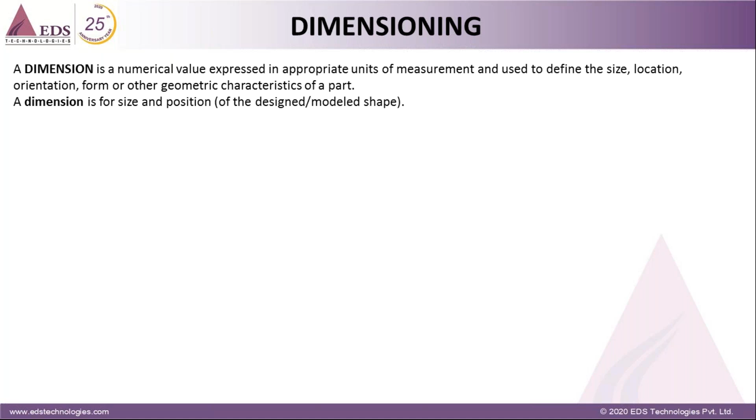We know what is the position, what could be our reference, what is the position and all that stuff. And this position and size is very much important when you go for manufacturing. In manufacturing, the dimension will also have a tolerance, acceptable tolerances, you can say intentional tolerances. If it goes beyond that or below that, it is rework or scrap, whatever it is. So the dimension gives the variety.

It gives the variety of design product variants, or we can say drives product capacity derived from business needs. For example, today I'm manufacturing a 150cc engine vehicle, or a 16-seater aircraft, or a special purpose machine. It could be anything, like it may be taking care of some tonnage, or I may be working on some motors, a 1 megawatt or 2 megawatt or half HP motor, whatever it is. There is a new requirement: how fast I can adapt all my dimensions, all my calculations, everything to the new product. So it's like ease of whatever I get, and how best I can utilize my dimensions. So as you can see, it's very clear.

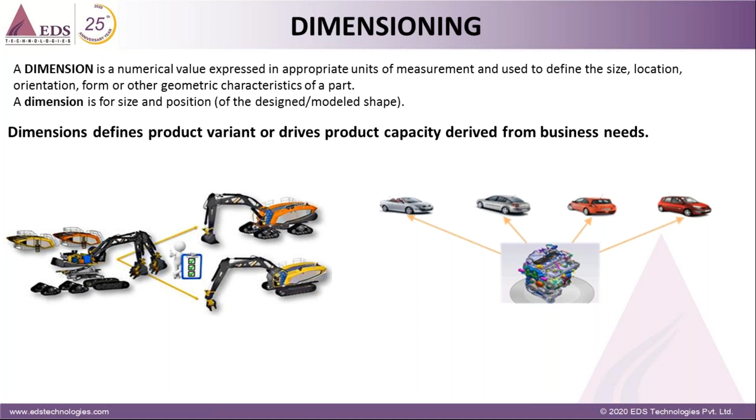I can use the engine for any variant of the car, or use the body of the heavy equipment machineries to fit my requirement, or my customer, client, or end user requirement. So what comes to mind is how fast we get solutions for the new requirement or variant. That is very important for us.

So whether my tool is capable of, or my system is capable of, whether our solutions are capable, or if any market has such kind of solutions which will help us in quick adoption. We can call this variant management.

Variant management, at the broader level of product lifecycle management, comes to the designer level, engineering department, design department, or R&D department: how I can play around with my dimensions, and how information is sent to the manufacturer through the design team. These are the questions that always come to mind when we see this.

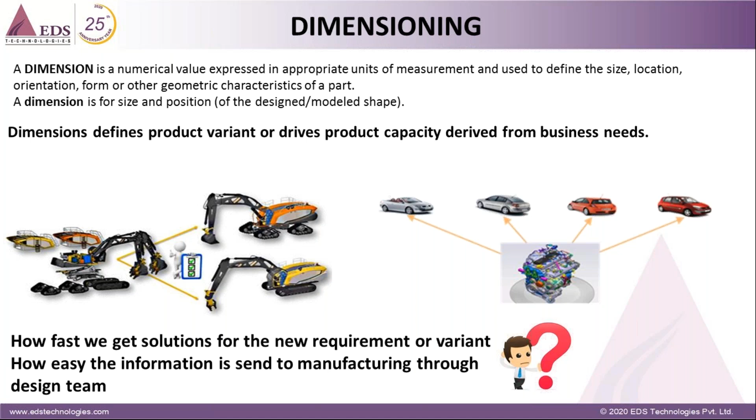I just wanted to quickly go through the evolution of the design process. There was a time in the 1970s when dimensions and drawings came into existence. We call it engineering drawing or machine drawing, and all the concepts were put into 2D design.

This 2D design probably started using drafting tables, with drafters and all that. Then came the evolution of new 2D softwares, and finally that 2D software was capable of doing a few iterations of whatever changes we wanted. Instead of needing 100 manpower, it was reduced to 10 to 20 people, moving from manual work to using software.

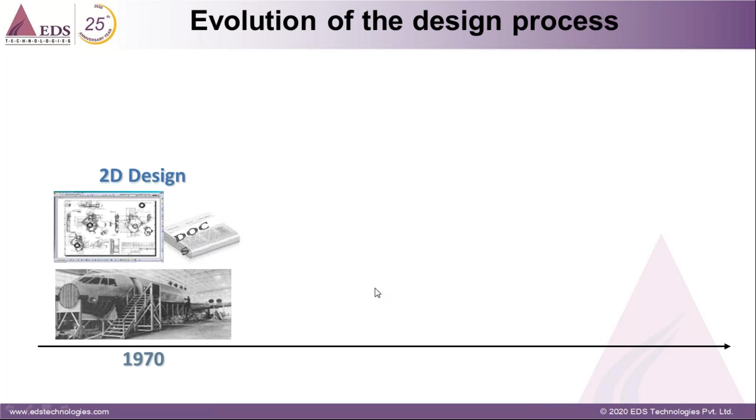Now, 2D design and drawing were converted into 3D in the 1990s. The Boeing 777, and even Toyota, and the entire DMU concept — the DMU of the aircraft was converted from 2D to 3D, along with the workflow, to check for clashes, like walking inside an aircraft virtually to see what issues exist. Boeing adopted some of these solutions, which I'll talk about later.

Then we come to today, where our design or manufacturing needs, or our sales people's quick adoption, require us to assess our dimensions for manufacturing, production, quality checks, and other things. That's the main reason we wanted to bring 3D design, or the 3D master, into existence. This makes communication very easy.

Now, what if we use this 2D drawing or 2D design? What problems arise in terms of business impact? As a company, a process, or an individual, you would have seen a few challenges with respect to what is happening.

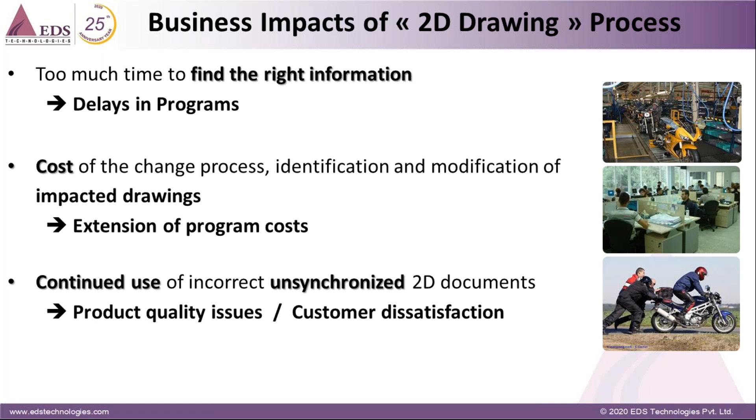The product quality issues and customer dissatisfaction, and too much time taken for quality understanding. For example, it is human, we may have some human errors also, and when you go specifically into the 2D drawing, it impacts design, manufacturing, and quality as such.

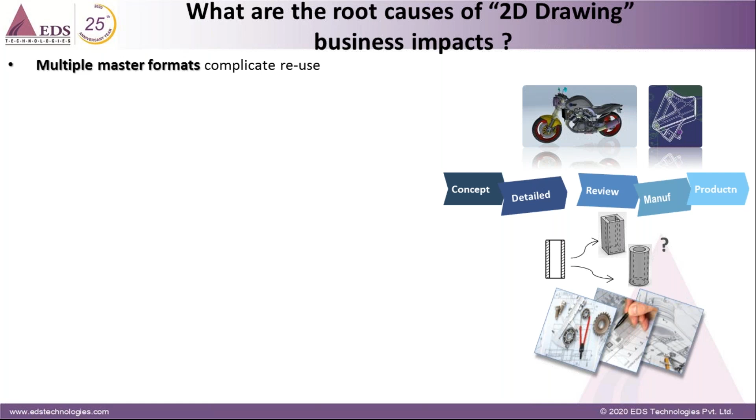As we already spoke, multiple master formats complicate reuse, so it becomes very difficult to know which one to take. So whether I'm in manufacturing, I have to wait for my CAD designer or the designer who has done this. No continuity among an increasing number of stakeholders.

It's obvious that as it goes out of the design department, the engineering team comes into it. Supply chain management, procurement or purchase department comes into it, and manufacturing, production, quality inspection, many others. So now there's no continuity. What we say is when you are into 2D drawing, I can just put a remark in the drawing or in the soft copy and send it back. How it is impacted in the background, that I may not be knowing.

Misinterpretation due to 2D drawings as a reference. It's a very big task.

We keep always talking to the purchase people in our day-to-day life. The designer goes and explains to manufacturing or production. So what happens is, if you see this, I've taken it from my 3D. If you see this image, it's all in anyone's perspective. What is it exactly? When I see this cross section, I can say it is rectangle, or I can say it's cylindrical. So it's all my misinterpretation, I can say, and it is not clear what is that I'm trying to say when it comes to 2D drawings.

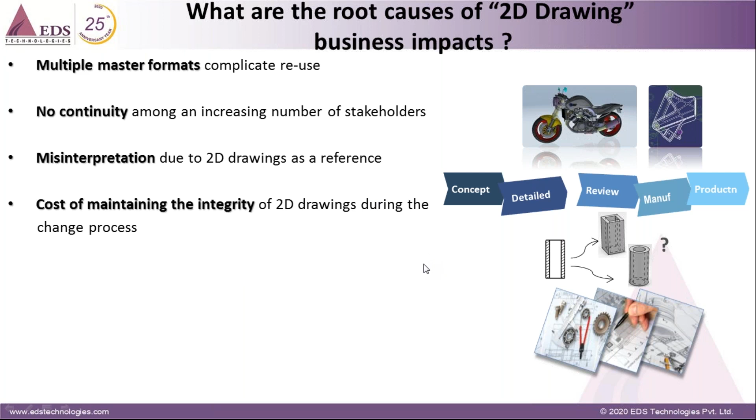Cost of maintaining the integrity of 2D drawings during the change process. So what is the impact? Again, I should have a newer version of it. I have to copy that and create a new one, try to modify a few things. Again, I have to change my layout and other things, and spend more time to get clarity in virtual assembly prototyping.

So when you say 2D and you are working on big assemblies, you have to spend a lot of time to realize what the drawing is trying to communicate with me as a manufacturer or production guy. And again, if it is taken after the production and manufacturing, and quality or inspection or whatever, and the validation comes into it, this virtual assembly prototyping takes a lot of time for my clarity.

Instead of that, I can better utilize it. So it all depends on my understanding. So we need to spend a lot of time in 2D assembly drawings, I can say.

And when it comes to tolerancing and GD&T, it's non-semantic when you go for 2D, and I'm not sure from part to assembly level due to missing 3D tolerance analysis, which is generally based on best practices. So I'm not using any 3D tolerance analysis here. I just give the dimensions and whatever I've done in the drawing. So these are a few business impacts which come through 2D drawing.

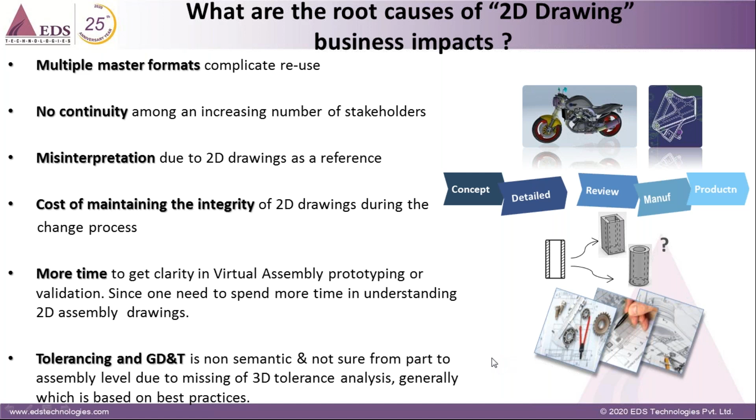Okay, and when it comes to manufacturing business challenges, because they have their own challenges: managing the cost of product complexity, evolving consumer expectations. Today, customers' expectations are highly demanding. Their expectations are that we have to be very fast in the market, quick, reactive, and how fast I'm changing in my change action in my present design. And managing product complexity and diversity.

Complexity because of the many new types of manufacturing. Additive manufacturing is one example - whichever process I'm not able to get in the standard process, I can go for additive manufacturing, quick reference or quick manufacturing or whatever it is, so that gives me more flexibility and other things. So this is one of the competition ways, or complexity is going high.

And established technology standardization and IP reuse. It's like I need one platform where I always talk about design standardization, which will also derive my new product development and new technologies. So this should help the manufacturers, who are facing huge issues of standardization. So then the standardization comes from the 3D level.

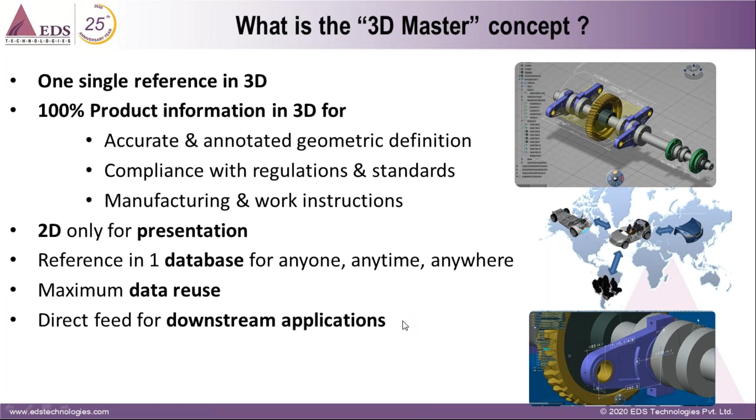And 3D master end-to-end process coverage - the conceptual design, the detailed design, the design review, manufacturing design, and production and installation. So here we are not talking about anything with respect to 2D design or 2D drawing. We're all talking about the 3D master again with the 3D design.

So it has some process. It starts with conceptual design, the detailed design, and the review. If you have any changes that you wanted to make, and the manufacturing and the production. So when it comes to the 3D master,

enabling the digital community. So we generally come across a lot of exchanges with respect to conceptual design to manufacturing and production. We are doing everything with the 3D, and also with our suppliers.

We cannot leave our suppliers behind - we have to grow ourselves with our suppliers by educating them on such technologies and making them also part of this transformation.

And also when we say that, we can also show this to your customers, authorities, like if you are going for standardization or anything like that, and you have made some technical partners, service partners, or even educational partners, or whomever it is, you can definitely share the details in all respects to 3D.

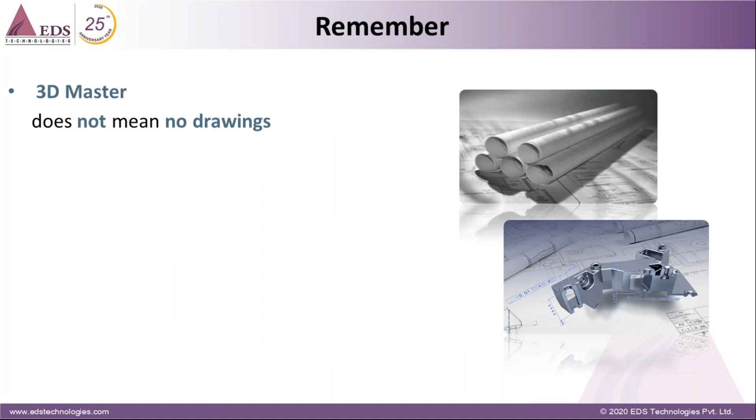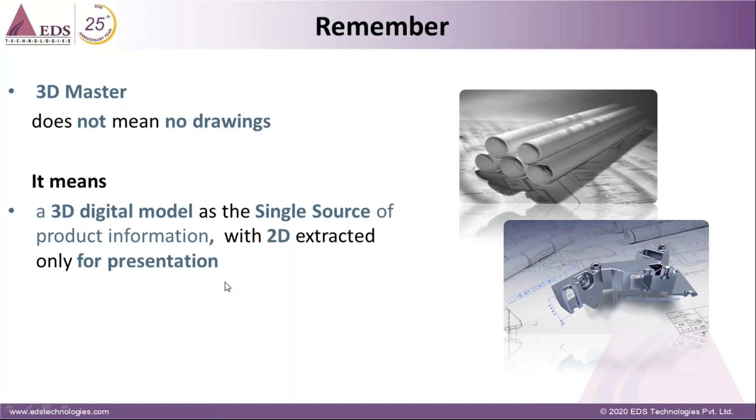A quick reminder that the 3D master does not mean no drawings. It will have drawings, but they're left as a presentation. As I said, it means a 3D digital model as a single source of product information, with the 2D extracted only for presentation. So this is only for the presentation layer, only a formality I can say. If I want, I can just give a print.

The 3D master value proposal is what we wanted to give: conceptual design, detailed design, experience, and manufacturing production, which we'll see one by one now. So I have a quick video for conceptual design, showing how conceptual design can help with the 2D layout in 3D design.

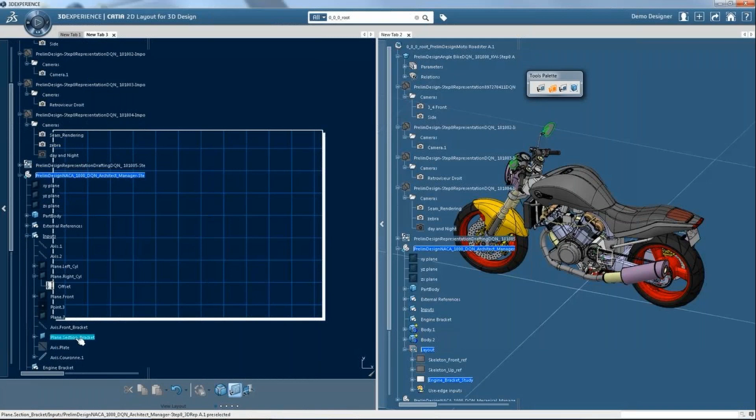So I'm now opening. The designer is opening the 2D layout for 3D design. Now I'm arranging all my views here, taking my section and whatever I wanted. I'm directly putting all my 3D data on this. Now you can see the window got split, and all the sections from my master design, the 3D master design, I'm just putting here. I'm not spending extra time here, just sizing and allocating inside the layout.

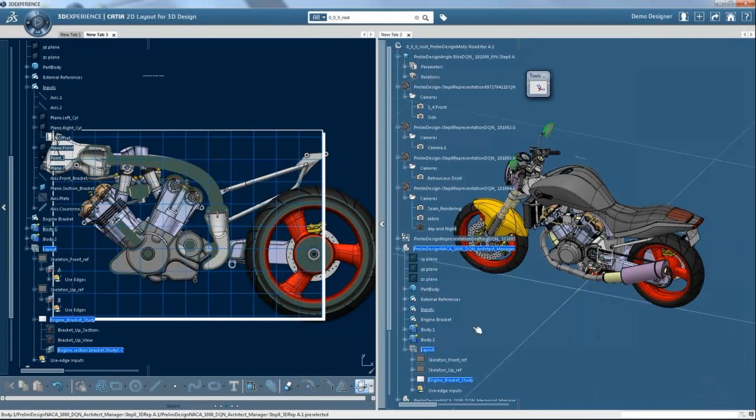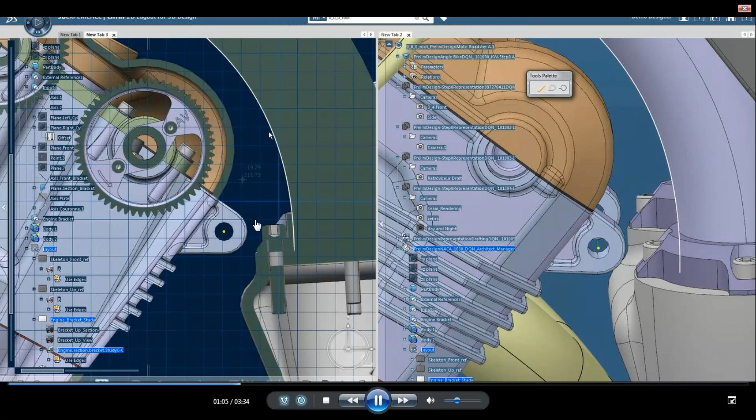And what happens here is you can also see there are a few changes that I'm doing, and I can also impact the changes here, directly taking the reference from my 3D, and it is highlighted in this 2D layout. This is what we call 2D layout for 3D design. So the impacts are happening in both screens. This is the understanding we get from the tool from 3D master.

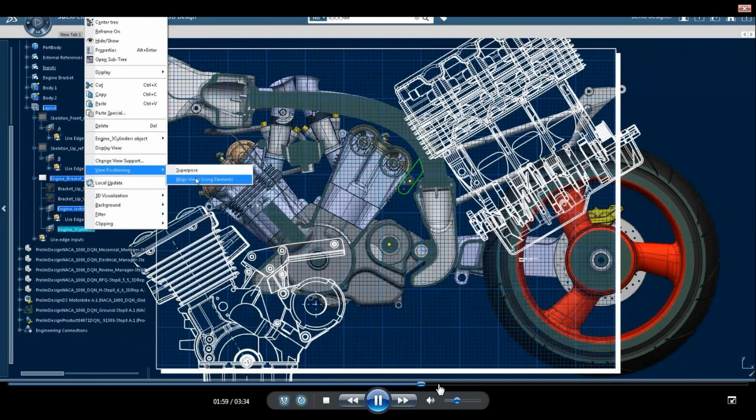So I'm bringing one more component here. I'm pasting my component, and this is my virtual validation that I'm doing at the assembly level.

So in parallel, I'm working with 2D conceptual as well as the 3D design.

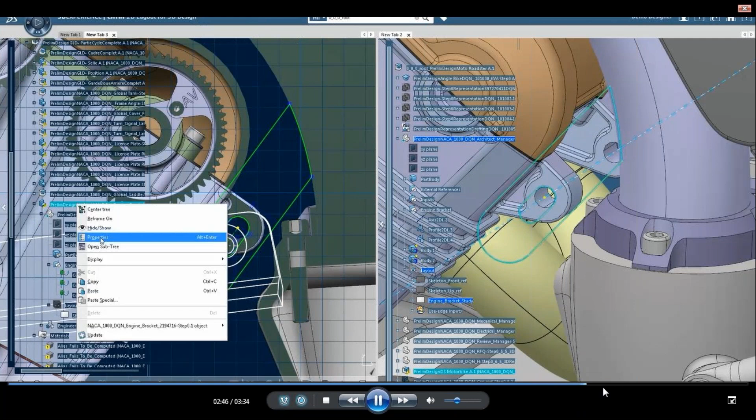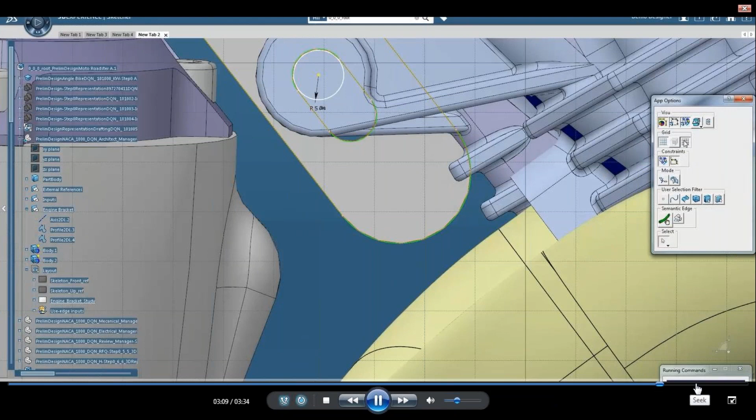So I've opened this single part, and whatever impacts I'm seeing, it's directly online. I need not update anything here. I've already done my drafting there, using my 3D master design for doing the drafting, because drafting is another only a formality that I wanted to show. So what we take from here is more flexibility. As you saw, the concept is on one side and the drafting is on the other. That becomes more flexibility and simplification in early study. You can understand what the manufacturing level of impacts is, happening at the early study only. That's one understanding we get from the conceptual study, keeping everything in mind with a single model definition. So it's very important for us.

And when you go to the detail design, I'll start with the part level of detail design that we give in the 3D master.

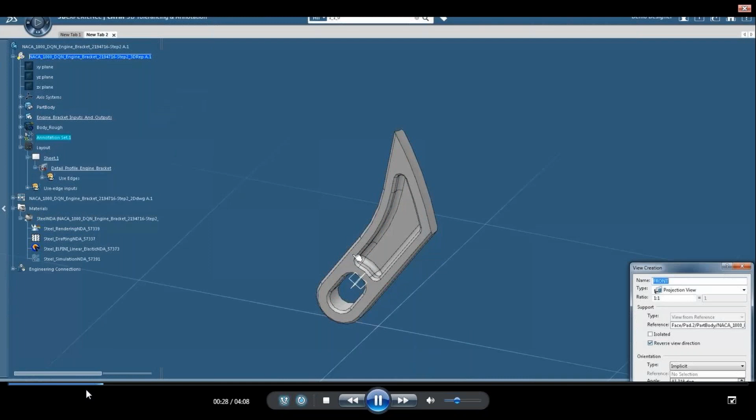So in this 3D detail design, I've taken the same part here, extended that, and I'll show you how to make the 3D master dimensions. It's like you're working on the same thing, instead of only creating views in the part or assembly level like in drafting sheets -- you do it the same way here. But you have to tell it, and it is more semantic. It will give me a semantic tool.

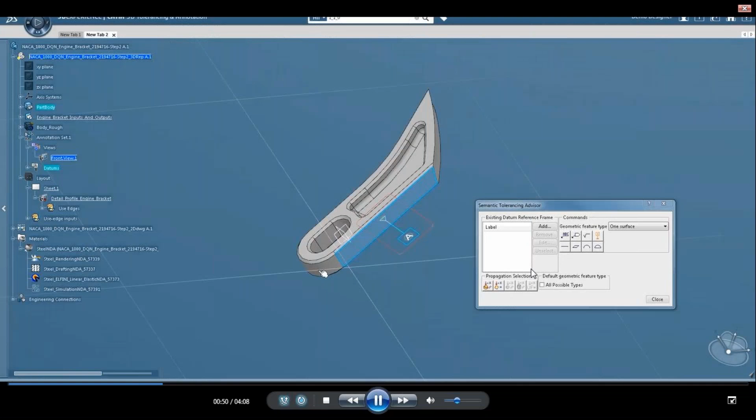Like if I select one of the heads, now you can see the possibility it can have the GD&T, and I can make it as a reference, or flatness, straightness, or whatever it is, I can give it here. And the tolerances -- if I don't want to give it at the GD&T level, I want to give my own tolerances, that is also possible here. You can see it at the radius level with plus 0.2, say, and the other one.

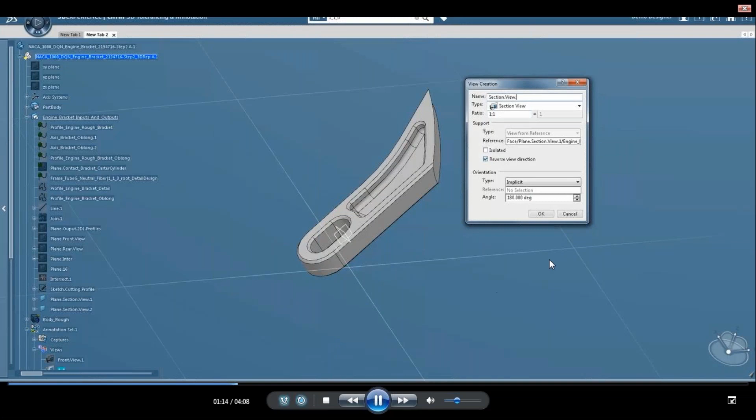And I'm doing another sectional view here. One is the front view I have completed. Now I'll take another scene, or another section, and this is the section I wanted to showcase. In this way, I just communicate with everyone, and I send this file in a neutral, readable, lightweight format. It's only a viewing authorization if I give it to them, not an editing authorization.

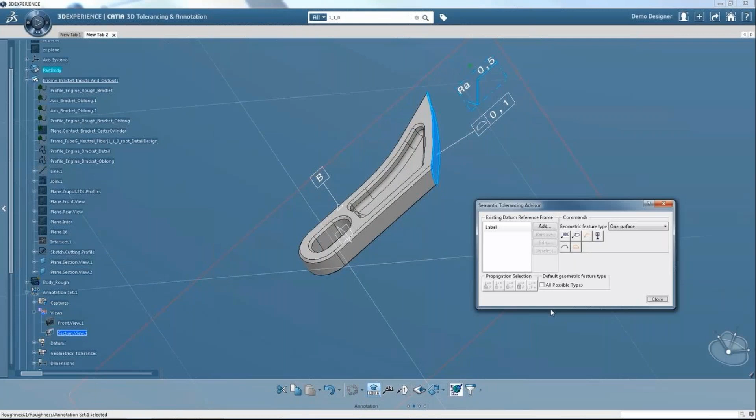So it will be very easy for them to understand, and once it becomes habituated in our system, the communication becomes very fast, and we can also think about analyzing or spend more time on new product development. As you saw, I've selected this extended hole.

And I've selected all my surfaces and what tolerances and other things I wanted to give it. So we are going for the other section now. So what is that? It comes to my mind to give all those tolerances.

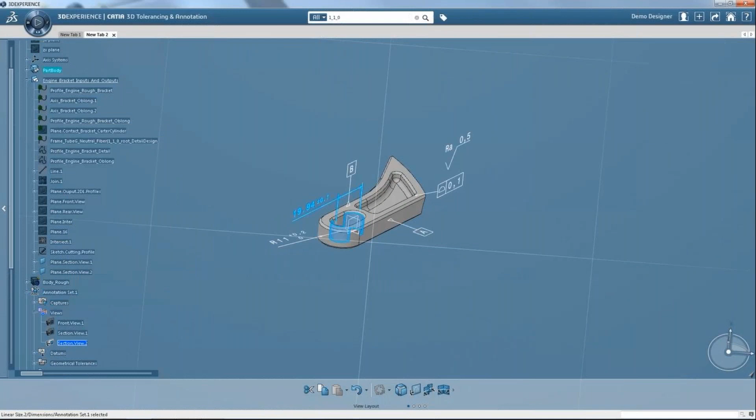What about the manufacturability? It is two ways. One is whatever manufacturability which is in-house, we have that capacity or provision. We can design in such a way, or it is left to the manufacturing person. If he is able to achieve it with a traditional approach, he can do it, or he should go with non-traditional, new methods. It all depends upon what limitations or tolerances he can achieve.

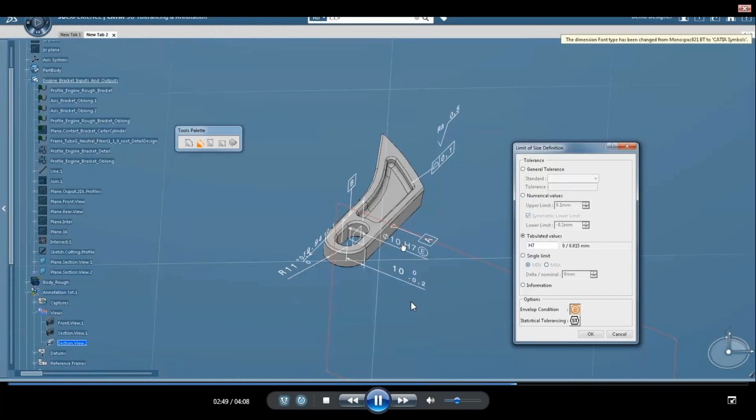So all these things, I'm doing all the drafting views, I can say. I'm doing it in the view column, that is in the annotation set, captures and views. In that I'm capturing each and every view here, each and every section here. So it becomes very easy, and whatever maximum material condition...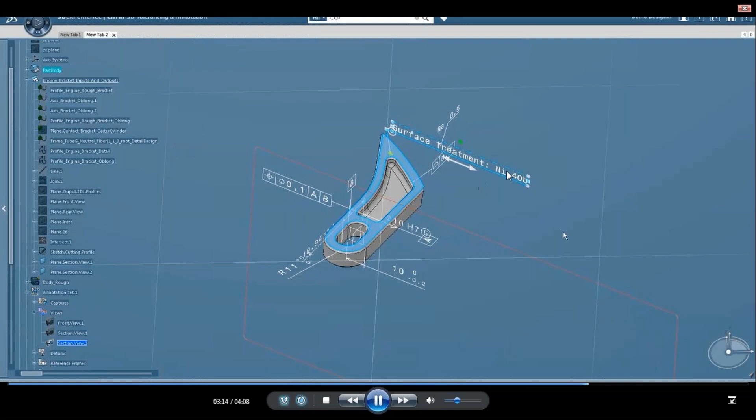Other material conditions, whatever I wanted to specify, I can specify the leader text, the notes, everything I can do it here. The surface treatment, I'm specifying Ni 40B here. So all this, and I can have all the properties and other things I can do it.

So this is how the detailed design is done at the part level of understanding. Once it is done, I can filter whatever I wanted on the view, and the same thing I can also hide here, or whatever views we have done. Now we can see it in the normal views of each specified section of views.

Okay, now at the assembly level, let's see how best we can utilize this tool. At the part level, the understanding is very clear and straightforward, saying whatever views are there, we can do it. So now we'll try to see what this is talking about with respect to the same part level and also the assembly level with different parts.

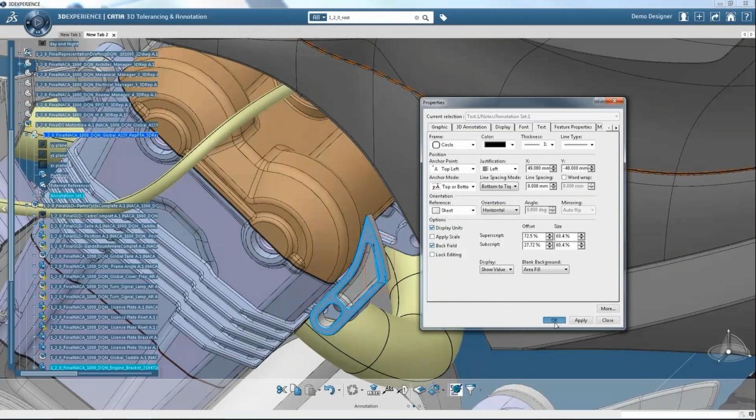So at the assembly level, I'm specifying the same thing here, with respect to the other part, and I'm showing the dimensions between one part and the other part. I'm also doing the ballooning, and if I want to add some text and other things, that is also possible for me. So I use that bracket to do ballooning, and using another component, I give a different name for automatic ballooning, which we do regularly in drafting.

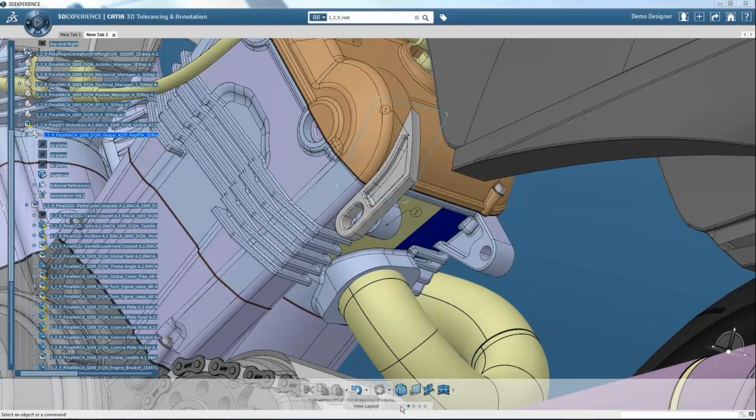And I'm taking another section here. So I'm going with a view. And once I select that surface, it will tell me what is the best I can do, or I wanted to give a dimension between two surfaces.

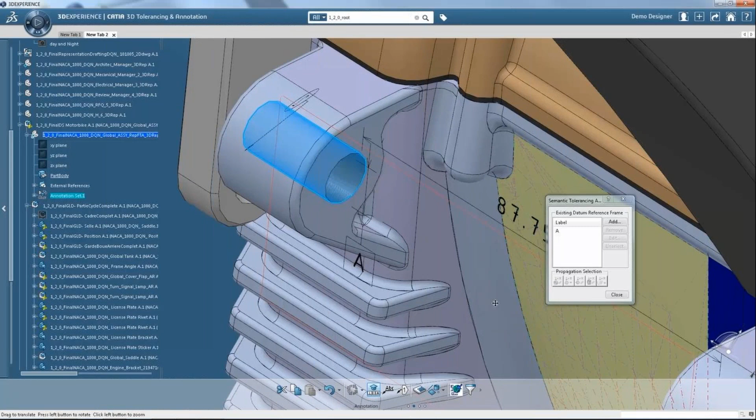And whatever standards, like H7 or whatever hole or shaft standards I wanted to specify, and I wanted to take some references, datum definition, it has become very simplified. So I'm taking this axis system as my reference, and if I want to give some position for this particular hole, that is also possible to be given.

And if there's a quick understanding, if there's any flaw or mistake done in the concept, you can directly double click there and edit. That's what I'm trying to show. Change the pocket, whatever dimensions I wanted, and come back, and I'm still in the same assembly level. And see, I can collaborate. I'm using this Enovia lifecycle collaboration also.

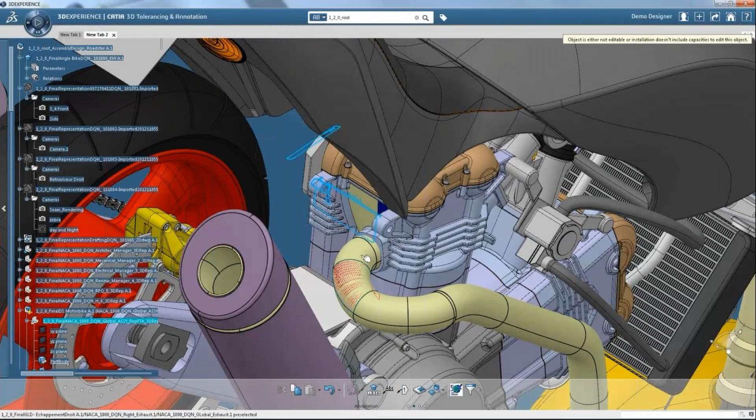The best thing is we have a lightweight, web browser version. I'll try to show it in the web browser, how I can open those dimensions and view. So it's not necessary for everyone to have the licenses. There are a few additional modules which will help me view my different dimensions in 3D in the web interface.

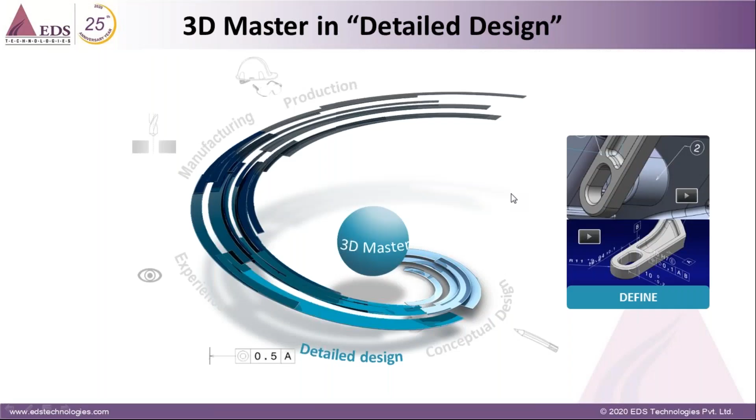Okay, the key understanding, I can say, is quality improvement and error reduction, because at the part level, in the assembly, if there are any modifications you find, we can directly respond to it. And at the concept level also, we have seen how we can make use of 2D layout for 3D designs. That concept is also possible.

Product definition accuracy improvement, and also cost reduction, that is a key thing that adds value when we adopt 3D master in our system—directly reusable for any process. Whether design process, manufacturing, engineering process, quality checking, inspection, or many other processes. We can even involve sales, and they do tagging—as soon as they show this to the customer and the customer says there are changes, they just type it. That session comes to you, and you can tag the people also. Productivity improved for parts family, that is also very much important.

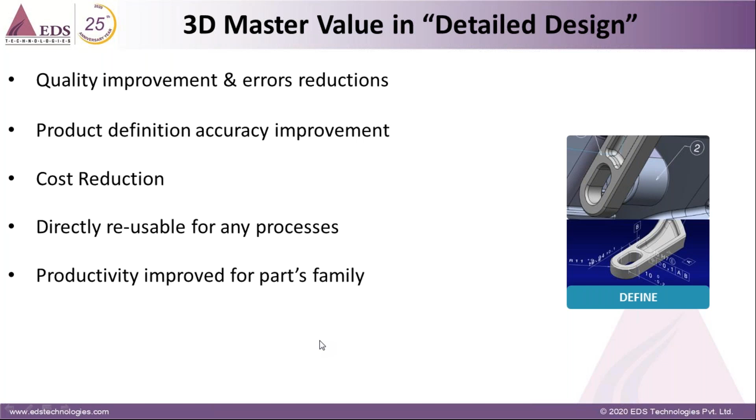Now we'll see the experience design—what we get out of the box when we go with 3D master.

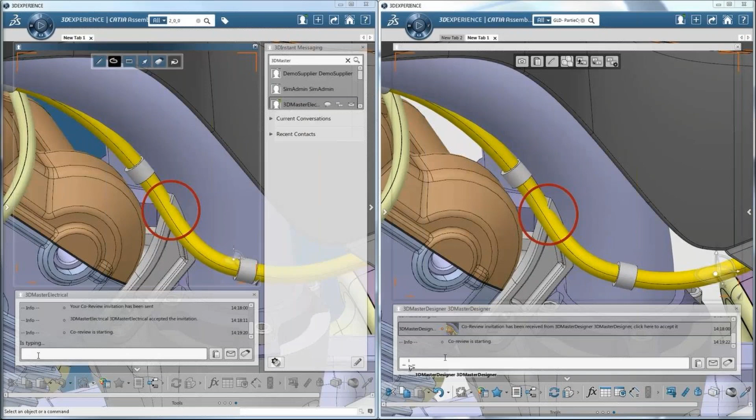More than that, if the user is pointing out some changes here, saying there are some flaws observed during 3D validation, I'm doing it in my lightweight format, and he gives justification for what needs to be done to change the process. So now he is moving his harnessing to a different location to make sure there are no clashes during validation. This kind of collaborative understanding comes with 3D master when you are working around it.

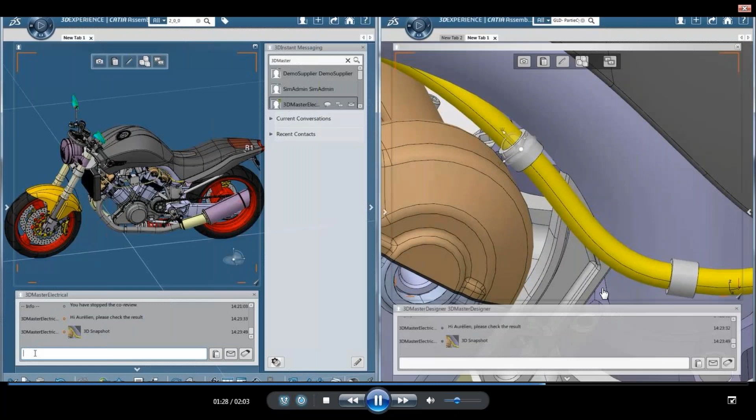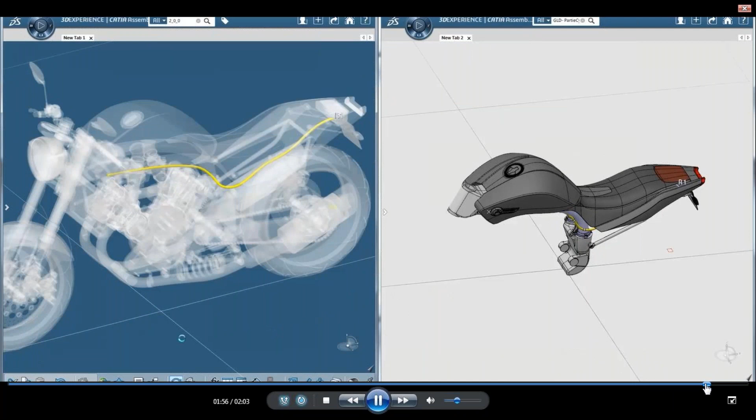And again, when we have applied annotations, or applied our 3D master system, automatically you can see here that the 3D master electrification changes in the background also. So I need not spend extra time to even do a small update with my drawing—it is not required for me to do it. So this is the full level of experience collaboration that we can have here.

That will help me have product definition available for anyone, anywhere, anytime. This we saw with the example of collaboration experience, multidiscipline support.

This is what we wanted for any product development or existing products to get involved—like manufacturing techniques getting involved with new techniques where they are introduced to design, and they improvise the process, improvise the design level, and other things—real-time concurrent design and review.

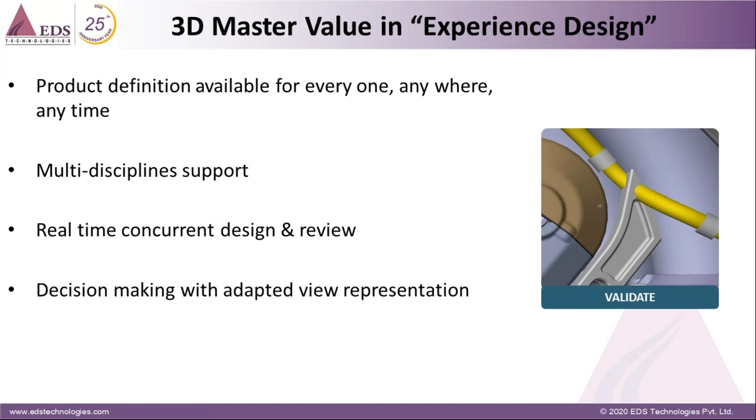And decision making with adapted view representation—whatever discussions we make can also be captured here, and we can tag all the stakeholders on it. And then it comes to manufacturing—I'll show you another quick demo on manufacturing.

Here, if you see in manufacturing, I'll also manufacture my part keeping all my dimensions open. This is missing in the 2D world, I can say, in 2D drafting or 2D drawing. So you can see all my manufacturing—I kept all my FTA, my 3D annotations, 3D symbols, GD&T, my tolerance, everything kept open during my manufacturing.

That is, if you see here, I'm using the Delmia Mill-Turn Machining app. During my manufacturing, I have kept all my dimensions open, so this will be another added advantage. And if there is any problem the manufacturer is facing, he can directly see and view that, and understand what he needs to do.

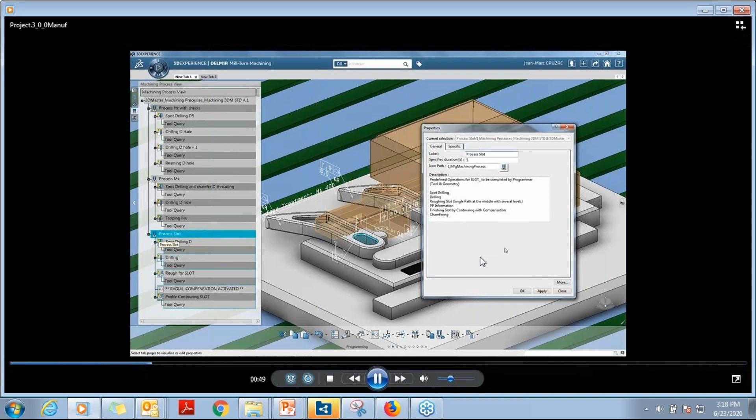Now he's setting up all his properties to start the machining. Once the input is done, he will start the machining. After the arrangements, stock, and whatever the end product and other things he wanted to give it, he'll specify that.

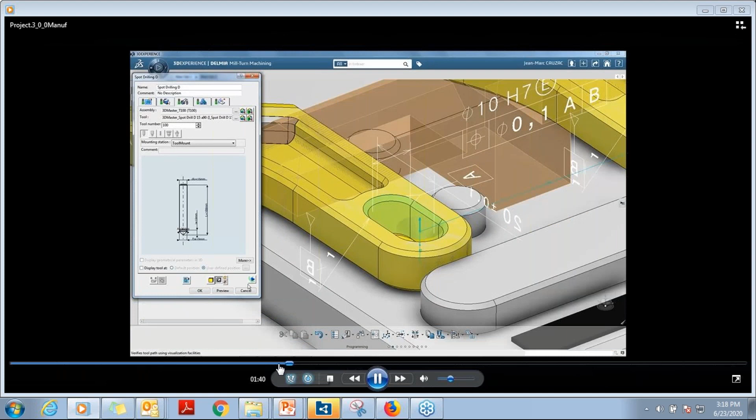After specifying all the tools and other things, now he goes and understands where he wanted to select. While selecting, he'll also see what standard the designer is going to give, like diameter 10H7, and what position tolerance he can go for. What is the reference for me? A and B is my datum reference. So this is what I can read during my manufacturing. This is the part level of understanding.

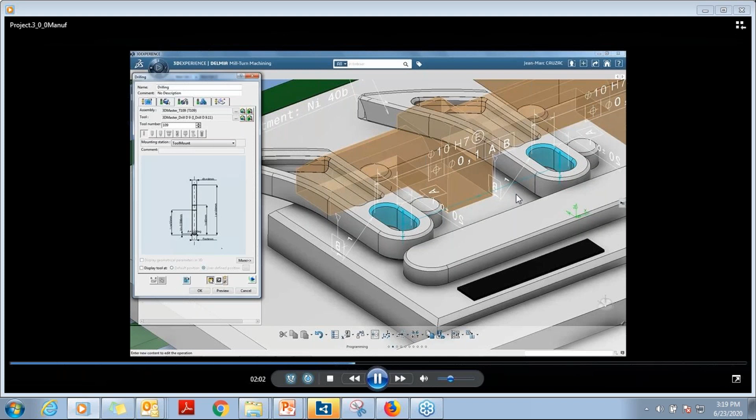Even for assembly you can get into it, like you can project big projectors, and the design can be kept in 3D and viewed, or individually we can give a display system where it can be a tab, a smartphone, or some display system if we are introducing it to our shop floors, assembly unit, production, or whoever we want to communicate with easily. This becomes easier when we see annotations, and there's an option to turn off those annotations if we don't want them.

So he continues with this spot drilling, whatever process he wanted to do. With this, I'll cross-check and verify — virtual validation becomes easier for me now. This is what I wanted to justify when I say virtual validation with prototyping, in assembly or part level understanding.

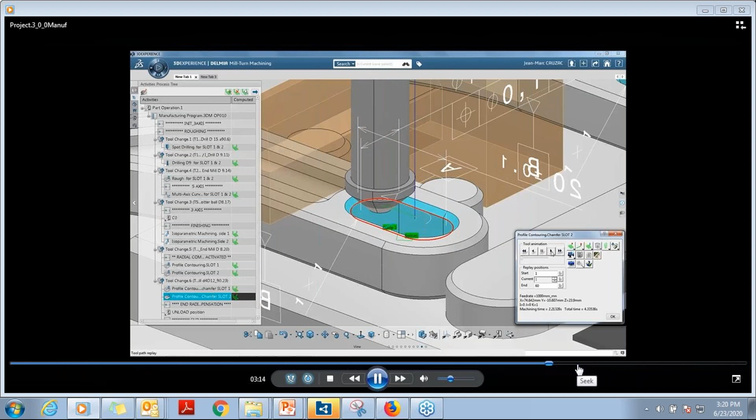The machining process continues, and I can come back and validate whether all the dimensions are correct or not. You can also send it back to the designer. And this is the machining process continuing.

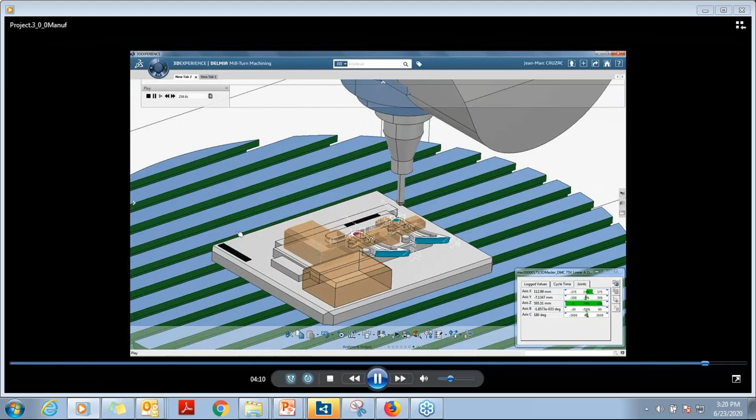Okay, and then it comes to detailing. As I said, 2D is only for the presentation layer. So now, in the presentation layer, I've completed and captured all my views and other things. I'll directly put it to my detail sheet. I select the sheet here, create instructions or whatever template I want, and whatever color I want, I can represent here. I just keep my views here — I'm not spending extra time for it.

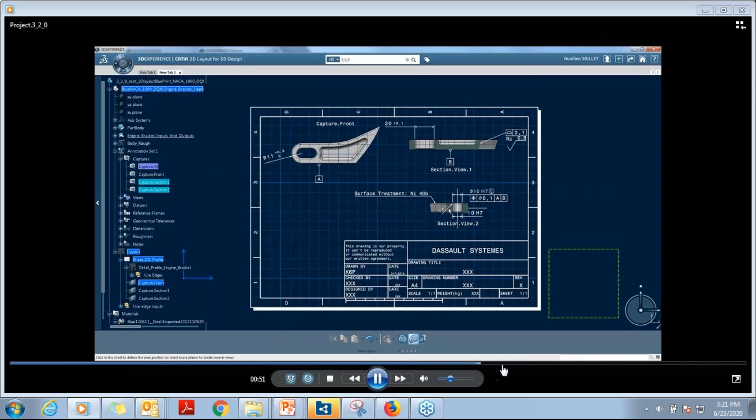You can see already it is done. As I said, you will not spend extra time — just give me a break, that's all, that is the thing you would do. So probably 5 minutes for arranging, and another couple of minutes for giving a print, or if there's any validation you want to verify, you can take another 1 or 2 minutes extra. This is what we wanted to do.

So this entire drafting, I wanted to achieve by 3D master. As we say, the 3D master value it gives us for a manufacturing unit is on-demand blueprint generation, which we saw, downstream application, and direct integration for all manufacturing applications.

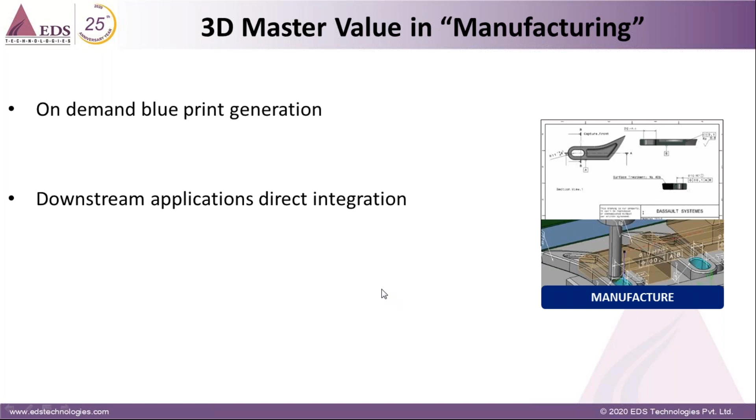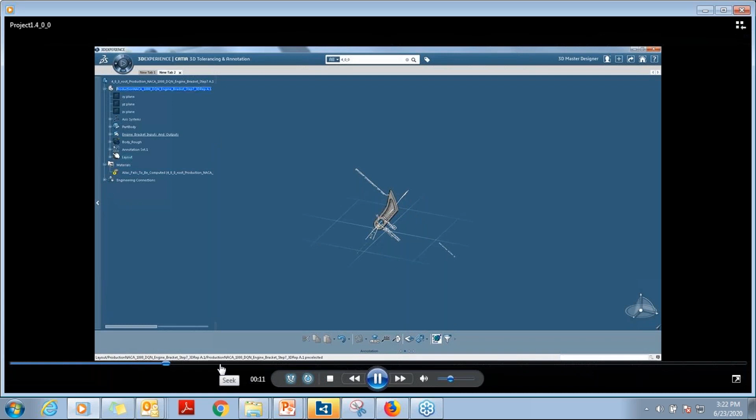Then it comes to production. There are two things we also see. One is this app, the ENOVIA collaborative lifecycle app, and I'm opening all my annotations with the 3D web app here. This web app will allow me to show all the details at the production level, for inspection level, and for quality checking and other things.

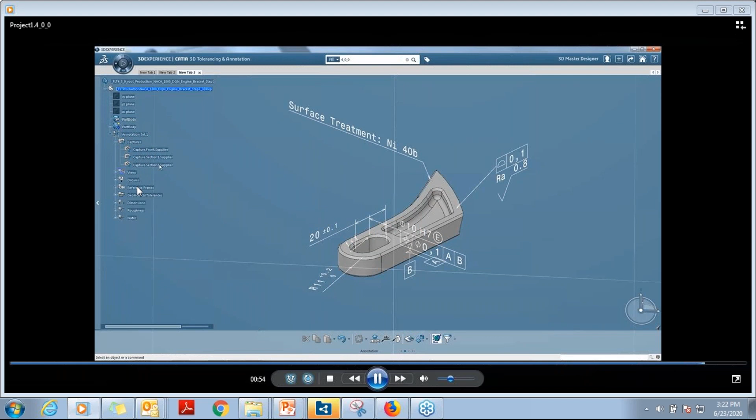Whatever changes I want to specify, that's also possible for me to do — I'm just selecting the capture and selecting the views here, whatever I have done. And the best part is the inspection. Every manufacturer will have his own inspection unit; without those checks, it is not possible.

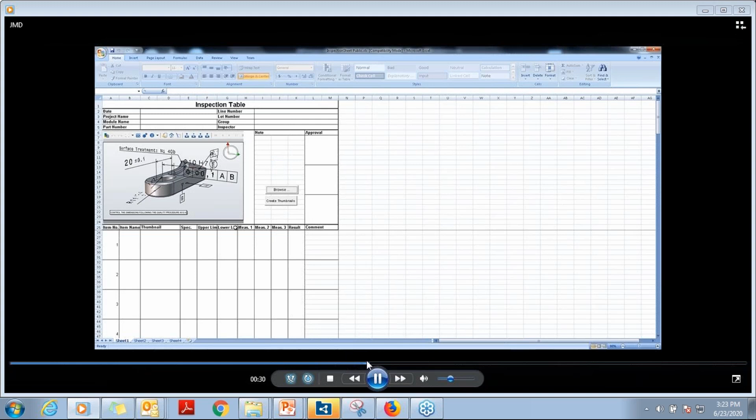So the other thing is people use 3D VIA Composer or CATIA Composer to do this. What it delivers for the inspection department, like this inspection table with all the thumbnails, you can directly load it, and whenever you update your part, it's directly linked to it. So I just create all my views — whatever views I want, I'll create them here, which I have standardly prepared now.

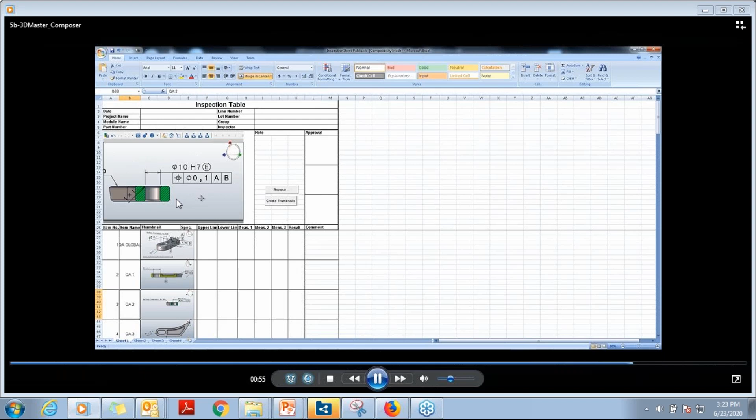If you are linking your 3D master along with CATIA Composer, that's possible. Other than that, we have an option of doing this capability within the 3D Experience, 3D Master, where we can create all the inspection tables and other things.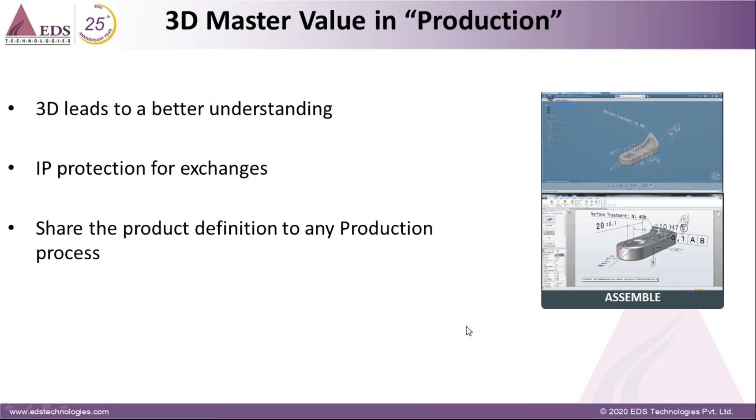We show you two scenarios here. The first scenario is for the design department working with the 3D Experience, considering we have a migration path for 3D Experience from CATIA, whatever it is, or you already have 3D Experience. The designer works on a CAD file and prepares MBD on the models, and puts it into the 3D Experience. All this you can open in lightweight mode—you can see it on the right part of the screen here.

The production department uses the 3D Viewer if they don't have synchronization, or they're disconnected at a remote location, or your suppliers aren't on this 3D Experience platform. We recommend that at first level you can also share access for a time, or for one project, one session, one scenario. Or if you don't want to do that, we have 3D XML and a 3D Viewer app to view the data without any connection—WAN, LAN, or whatever. We have a lightweight format of all the 3D Master you've done that you can open and view.

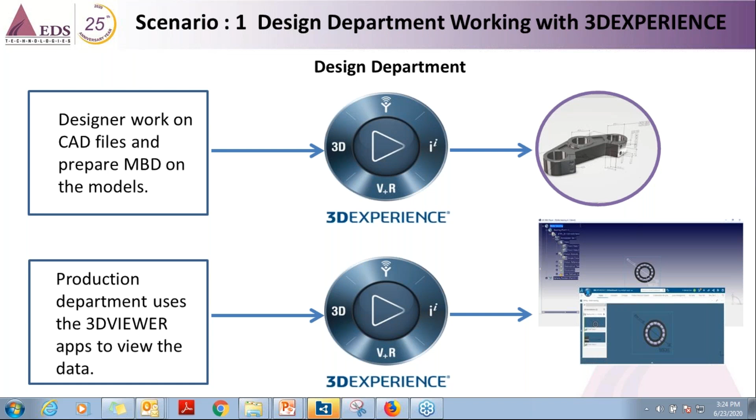The other scenario is the design department working with CATIA V5. You may be working with any CATIA file, any release, which can get into 3D Experience, and you can work on MBD—model based definition. If you don't have a license here, 3D Master will help you create all the annotations, scenes, sections, and other things.

The production department uses the same lightweight format for viewing the data, or from there you can directly take a print, or you can view it in the 3D Viewer. So that is also possible to do.

I have a small video which I've created for this on the tool, so I'll show you.

This is a typical 3D Experience page, and I'm searching for the part I'm working on. This is a web-based application—this widget I'll use is for 3D annotation inside. I'll search from my search tags for whatever part I want to view, so I'll search for a roller bearing here.

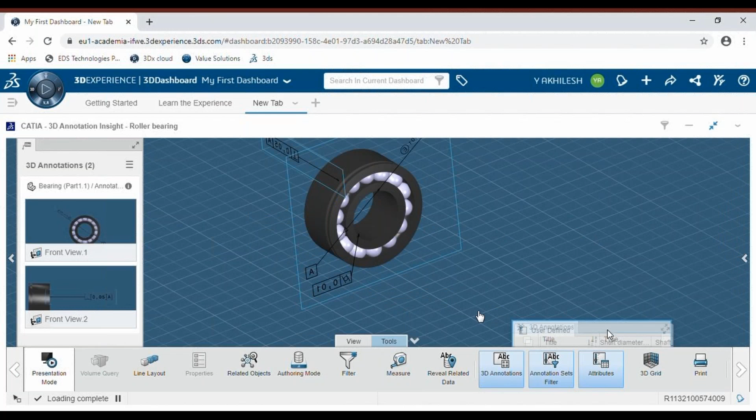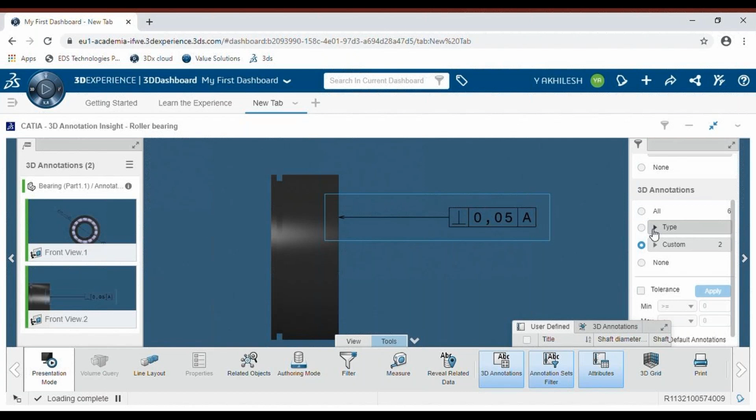Now this becomes easy for me. In this way I'm justifying many of the things I've told in the PPT—that is, protecting your IP. This is what I'm specifying: I can give only restricted access for my supplier, or just share the link to him. If he has good internet, he can access it. If he doesn't have good internet access, we have one more option to do it.

Or your remote shop location or whatever it is. I can view my datum, size, position, whatever it is possible for me to do. I can change my background. I can even point out what are the changes or manufacturing difficulties you are facing.

We have another app called 3D Play, which can help me in viewing all the things here, like 3D annotation inside. That doesn't require additional licenses, but any platform license you buy comes with the 3D Play app. I'm just searching my data here, and once I've got it, I do a drag and drop, that is sufficient. Or just click on it, or use the contextual menu to say what I wanted to view, whether in authoring mode, reviewing mode, editing mode, design mode, or visual mode, anything that we can do here.

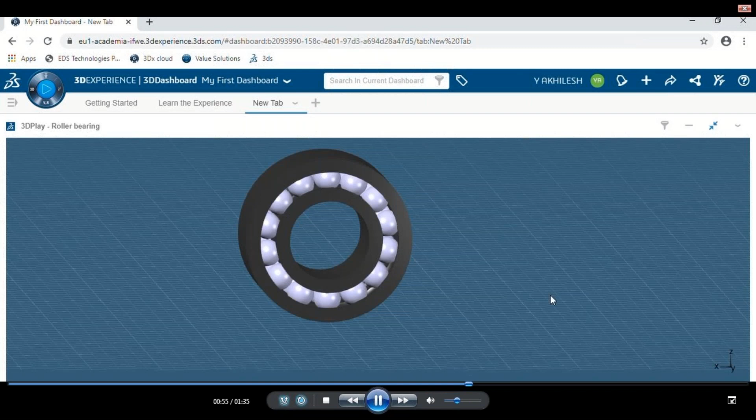So here I'm doing the tolerances. What is the possibility? Just click on that, on which part I wanted to show the tolerances here. So this is all visible now again. See here, I'm using the 3D Play, not the 3D annotation tool. I'm just showing it in the 3D Play app. This is the easy way of understanding, and you can see I'm connected to my cloud and just rotating here and everything.

So I'm purposefully showing my cloud access, which is given by Dassault for the demo purpose. And I have the native apps also, so in my native app, how best also I can do it.

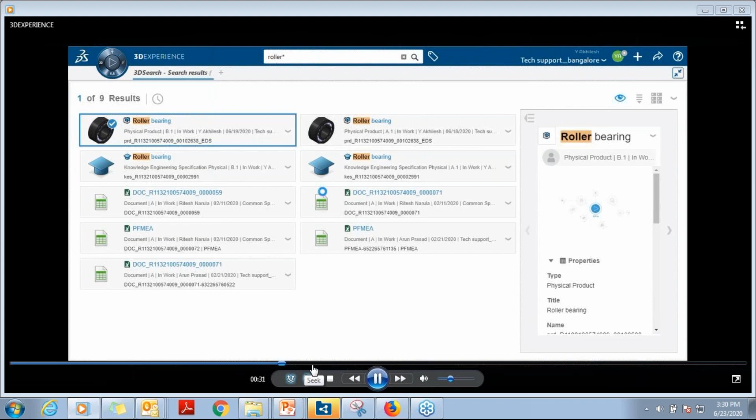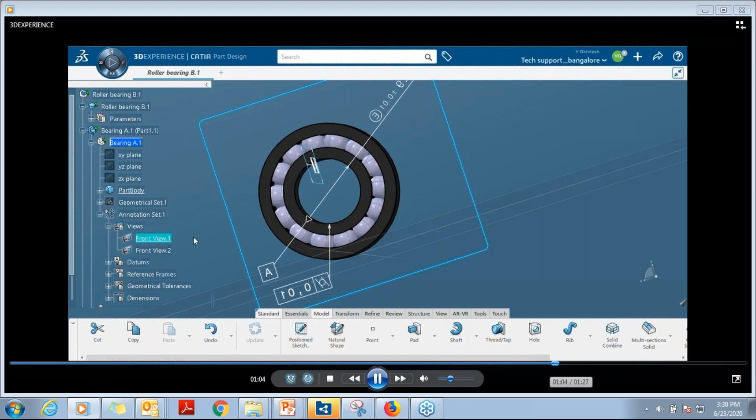So this is the CATIA that I wanted. Suppose this is the 3D file taken from the CATIA V5 file, and I'm loading that, giving all my instructions, and also opening it in the assembly evaluation. I wanted to show, during my manufacturing process before I set up a machine, the tool and assembly setup. Each department will have their own apps that we can see, and this is how the interface looks for CATIA part design or 3D master or whatever it is. You can take all the sections, just click on a particular section, and it will be visible for you. So that's how it works.

Okay, sorry for that. So now we can also have one more 3D viewer. You can write to us, we will help you in resolving, or if you have such scenarios, we can work on a newer scenario and show how CATIA or 3D Experience 3D Master can help in doing it.

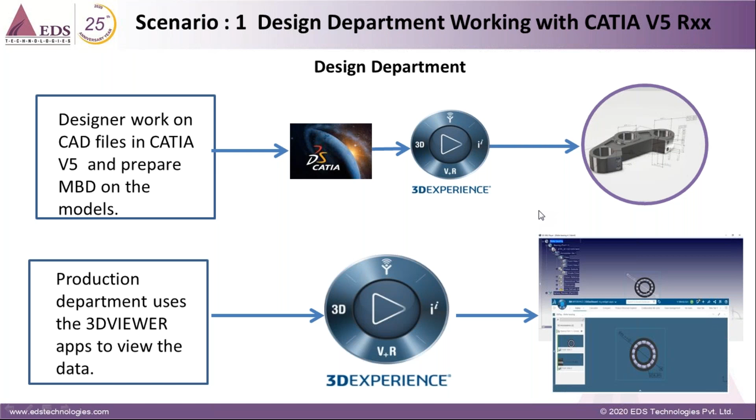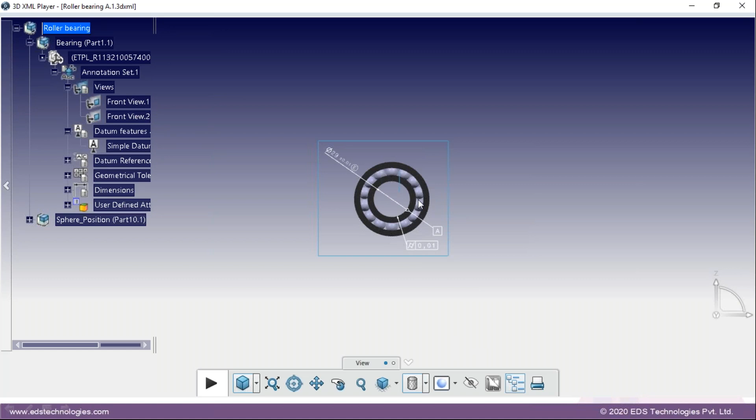We have already seen this scenario, and this is the one I wanted to explain. This is the 3D XML viewer, the 3D XML player. You can see all the annotations or datum references, the views and other things which I have done in the 3D Experience 3D Master, or the freeware player which we give to the manufacturing unit. They can view it in different views, and as soon as I click on the front view, it will automatically be normal to my viewing angle.

Goodrich Aerospace has gone with the MBD approach, staying competitive with supplier involvement, culture change and training. They're used for many purposes, I can say. Benefits include elimination of redundant data and efforts, single source of data minimizes error, and reduced rate cost from 20 to 30%.

And SAAB Aerospace, supplying Boeing 787 doors. As I said, Boeing drove SAAB Aerospace to come with this 3D Master. Under 3D Master, key achievements were: cost of making changes to production process reduced by 90%, 3D work instructions on the shop floor, and drawing time divided by 3. So this is what they've done.

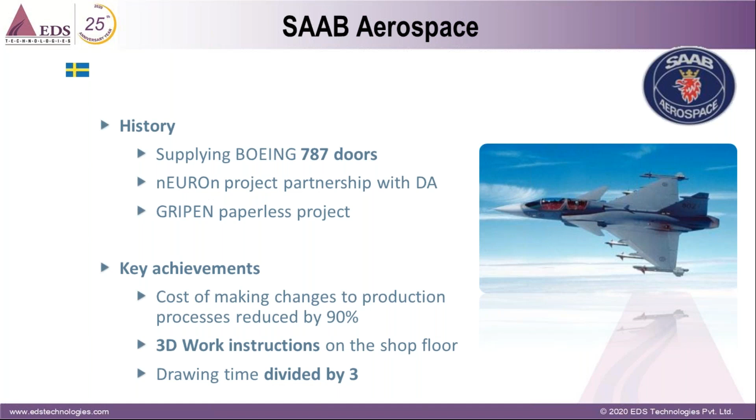And Ford, if you see, recommends using 3D Master to its 500 plus suppliers, in different processes like powertrain, chassis, mechanical engineering, configuration, body, NC machining, document automation tools, 3D functional tools and annotations, and many other things.

As global references, if you see, there are many. We have only identified a few and specified them in our presentation with specific case studies. If anyone wants to know how they are utilizing it, please contact us, we can share that. And if you have any similar cases, we can work with you using ready-made available case studies or ready-made footprints across the globe, which Dassault can also help us with in the background.

Today we just wanted to bring whatever the opportunity, how getting to 3D Master in an easy way. So, 3D Master, how we can help you, what is the best solution, what is the best offer. I think my colleague and friend Mr. Bharat will talk about it in my presentation.

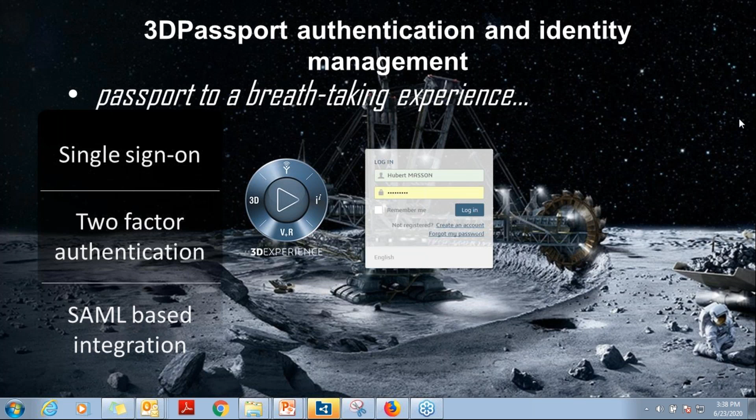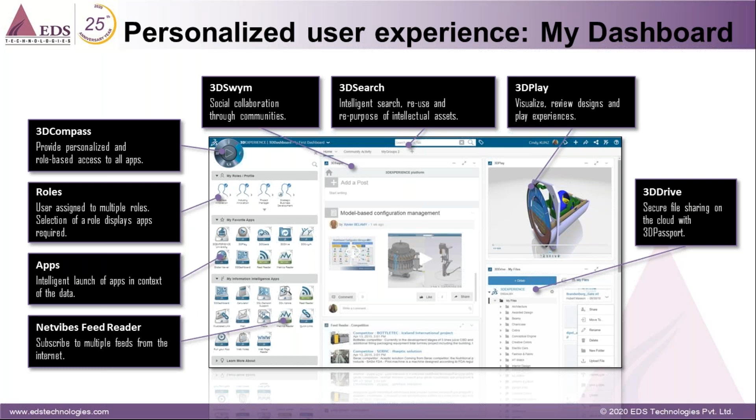This will be the typical page that looks like when we go for 3DExperience. This is the web page. It has all the data, my roles, whatever I'm accessing, the 3D search, 3D play, quick understanding, my own project-level folders that I can create. Like how you have Google Drive or Dropbox, you will have your own drive. You can also secure the files for downloading or uploading data, giving FTP authentication, that is also possible.

So we are concentrating more on the CATIA brand. In CATIA, we have 3D Master Designer, Mechanism Simulation Designer, and Function Driven Generative Designer. Bharat, over to you.

Dassault Systemes has come out with a very good one-time special offer. First point, it's an offer valid till 27 June 2020. And what this offer is, you can choose any one of the roles.